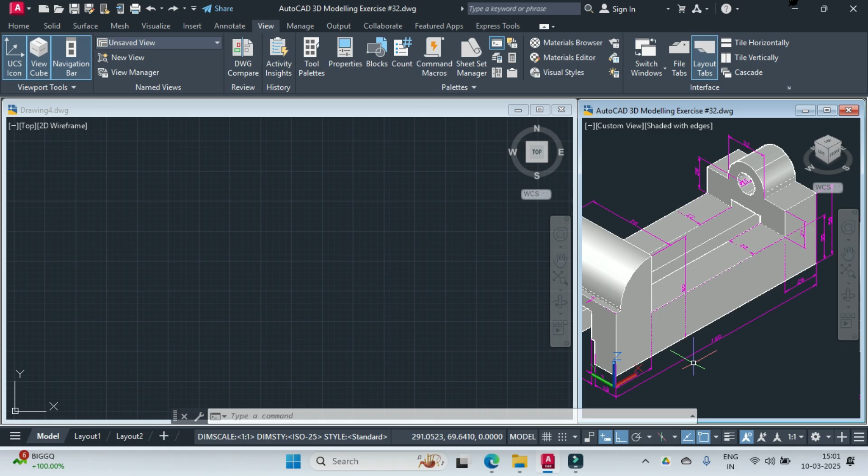Hi friends, in today's video tutorial, we would study how to prepare this geometry in AutoCAD. So as usual, before we start with the drafting, let us spend some time in analyzing this geometry and trying to see how we'll proceed with the drafting.

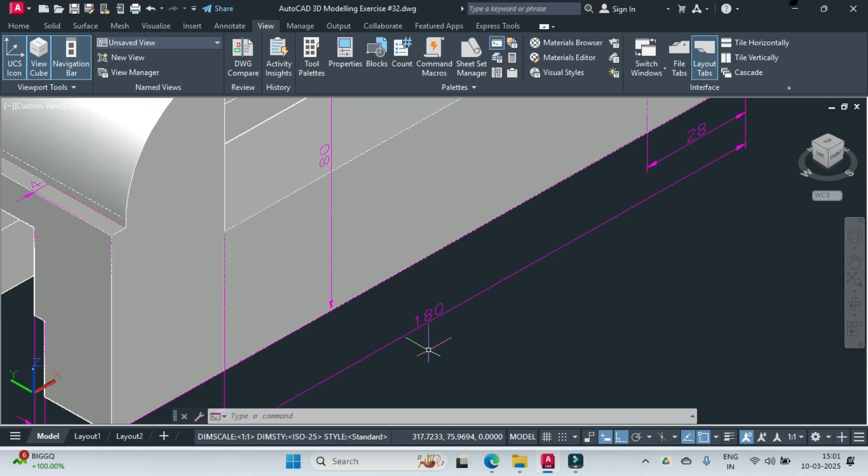After analyzing this drawing carefully, I feel that the best view to start this drawing would be in the front view. So we'll first change the view to front view, and using the P-line command, we'll begin by drawing one line of 180 units, then upwards 56 units, then to the left 28 units, then downwards 21 units. Why 21? Because 56 minus 35, so 21 units.

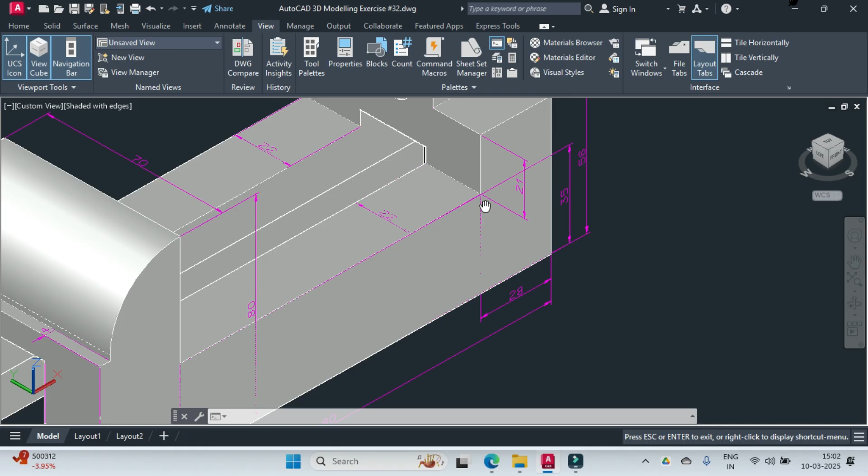Then to the left it would be 180 minus 32 minus 28, so this would be 120. Then we would go on the top 45 units, and that is because this whole distance is 80 units and this distance is 35, so 80 minus 35, so this distance would be 45.

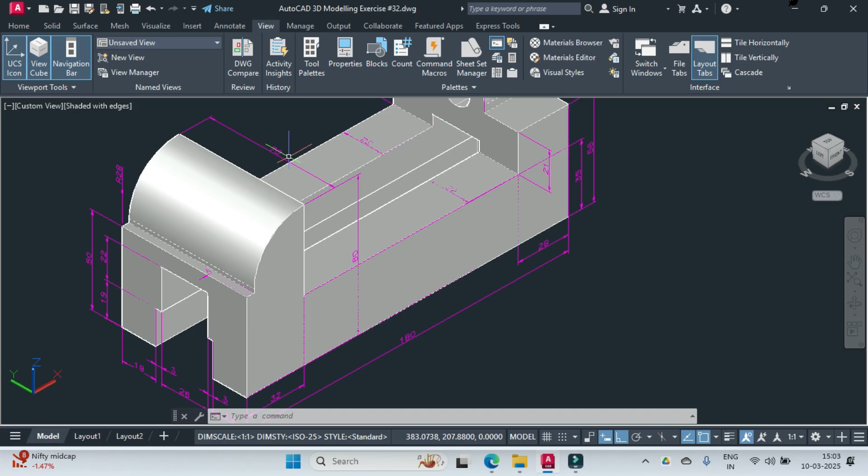Then we would go to the left, and you can see the radius for this fillet is 28, hence we'll go to the left as 28, then come down 30 units, then to the left 4 units, which is specified over here, and then C for close. So we'll get this profile in the front view. Then we go into the isometric view and extrude this to a thickness of 70 units.

Then we'll proceed with making this profile. Now, while making this profile, it is recommended that you first change the view to the left view. And in the left view, on the side, we'll begin by drawing one circle of 16 dia, and same center point another circle of 32 dia.

Then we'll draw one line. You can see this distance is 21 and this distance is 25. So we'll draw one line quadrantial to this downwards 4 units from here, and another line of 4 units from here, and then join it over here and cut this circle. Then extrude this outside to a thickness of 28 units. You can see this is the 28 units.

And then we'll move that entity from the center of this to the center of this particular surface. Then we'll use the union command and join both these entities and make it into one. Now we are left with making this profile.

So again, being in the left view, we'll begin by drawing one line from the base, and that line would be of 32 units, upward 19 units, then 3 units to the right, upward 22 units, 26 units this way, downwards 22, then again to the right 3 units, and C for close.

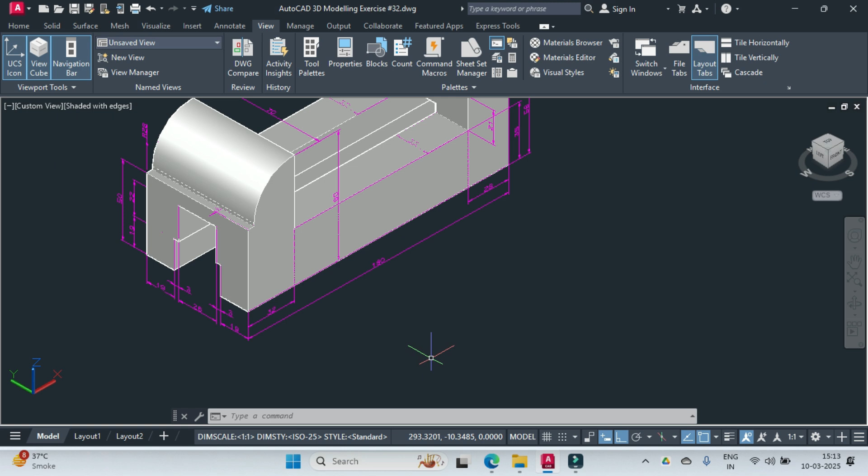Then we'll bring that profile in the center, and then using the press pull, we'll pull it outside and we get this cut. And our geometry would be complete. So let me show you how we'll proceed with this drafting.

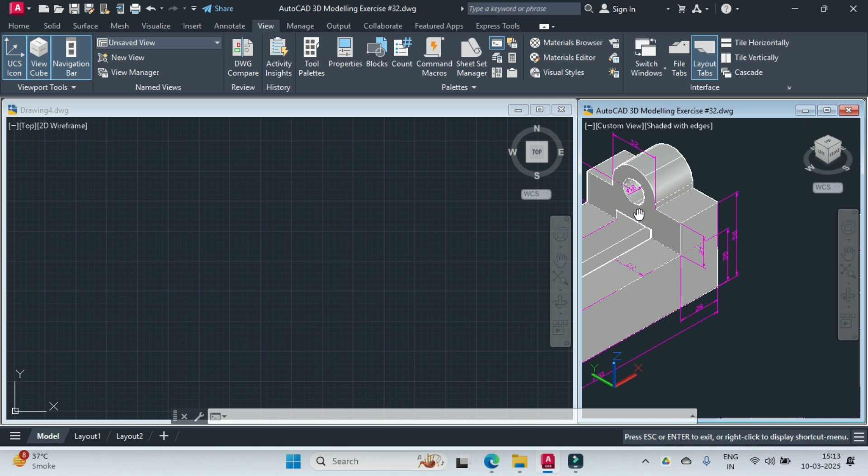So we'll first change the view to front view. Now we are in the front view, and we use the P-line command of AutoCAD and begin our drawing from here. So we'll first begin, we'll turn the ortho on.

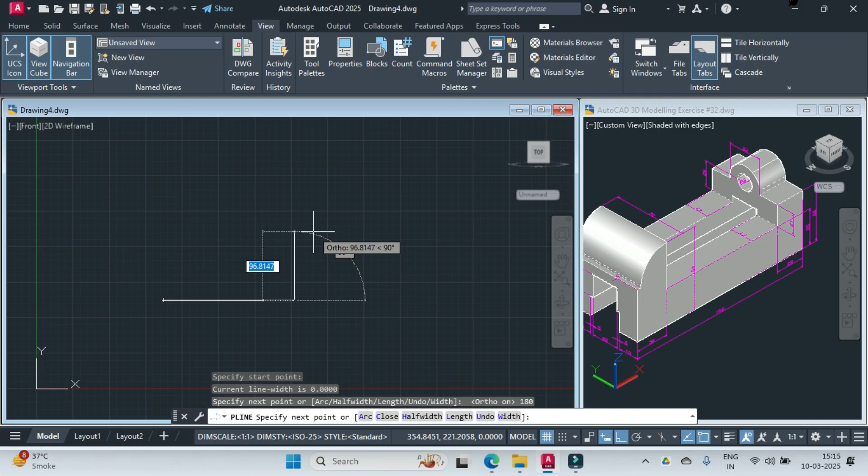So we'll begin by drawing one line of 180 units. Then moving that line upward to a distance of 56 units. Then to the left 28 units.

Then downward 21 units. Then to the left 120 units. Then upward 45 units. Then to the left 28 units. Then downwards 30 units. Then to the left 4 units. And finally C for close.

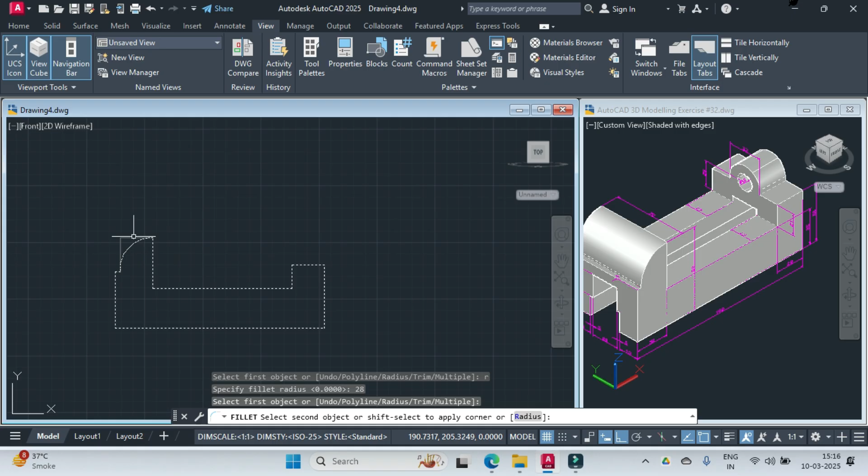And our profile is ready. Now we use the fillet command of AutoCAD, F for fillet and R for radius, and give the radius as 28 and click on this, and we get the filleted part.

Next we go into the southwest isometric view and we extrude the profile. So we extrude this profile to a thickness of 70 units. We type 70 and hit enter. And we change from 2D wireframe to shades of grey.

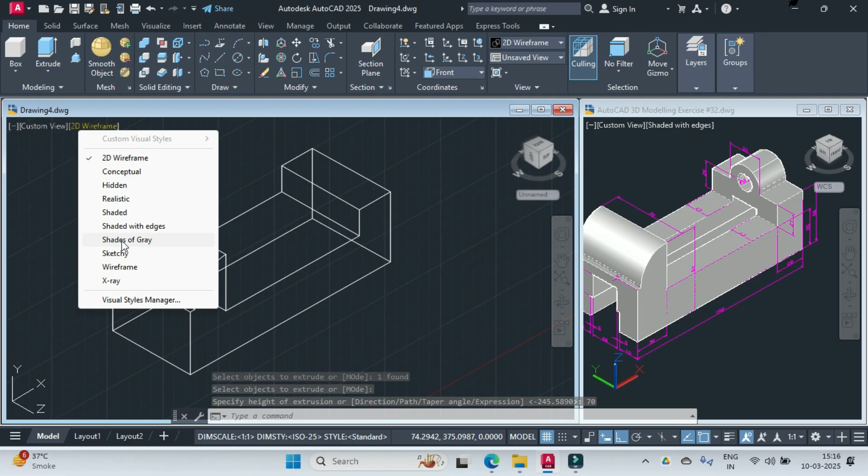Now we'll make this back portion. The first thing is we change the view to left view. You can see the grids over here. We'll begin by drawing this outer circle of 32 dia. So we select circle and select center diameter. Click anywhere outside and draw a circle of 32 dia.

Then we use the line command and draw one line from here downwards 4 units, to the right 32 units, and upwards 4 units. Press enter.

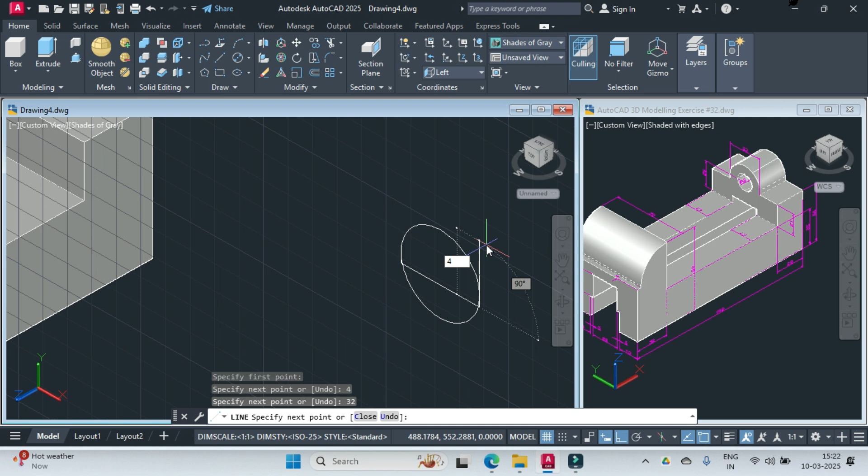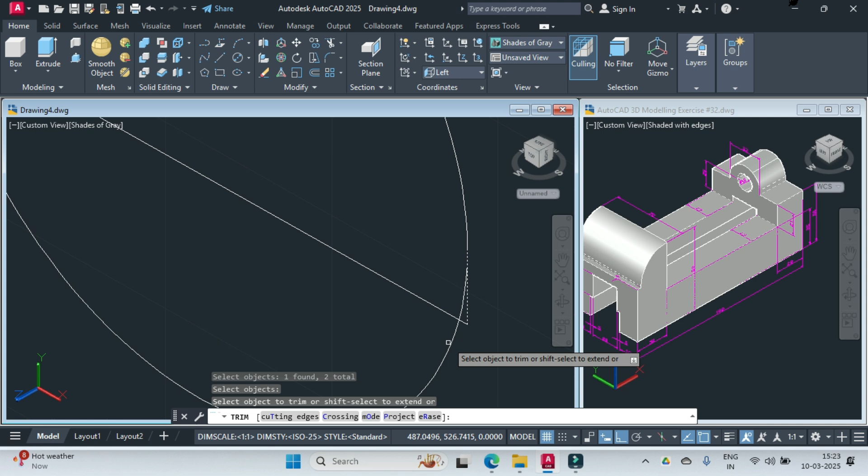Now we use the trim command. We type TR, double enter, select cutting edges — this is one cutting edge and this is the second cutting edge. Press enter and then click on the circle, and our profile is ready. We press escape to come out of the trim command.

Now we'll press pull this to a thickness of 28 units. So we use press pull and select our profile, press enter, and give a thickness of 28 units.

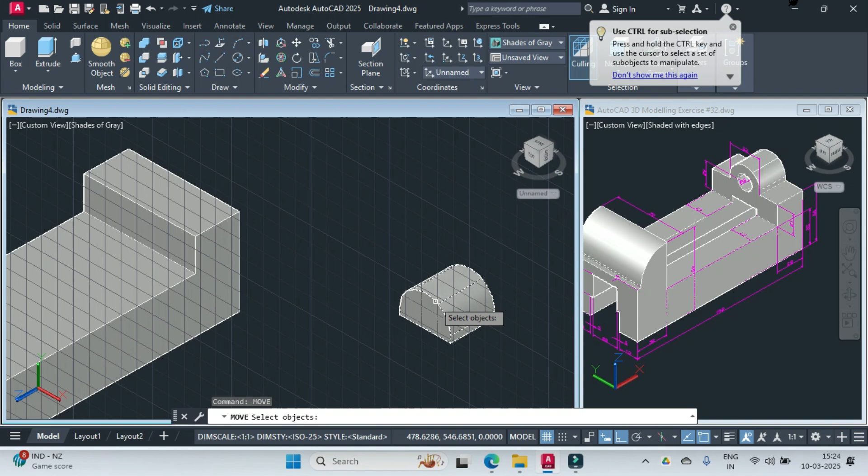Then press escape to come out of the press pull and we use the move command of AutoCAD. Select on the object, base point you select midpoint of this and move it to the midpoint of this. Then we use the union command of AutoCAD and select both these objects and make it into one.

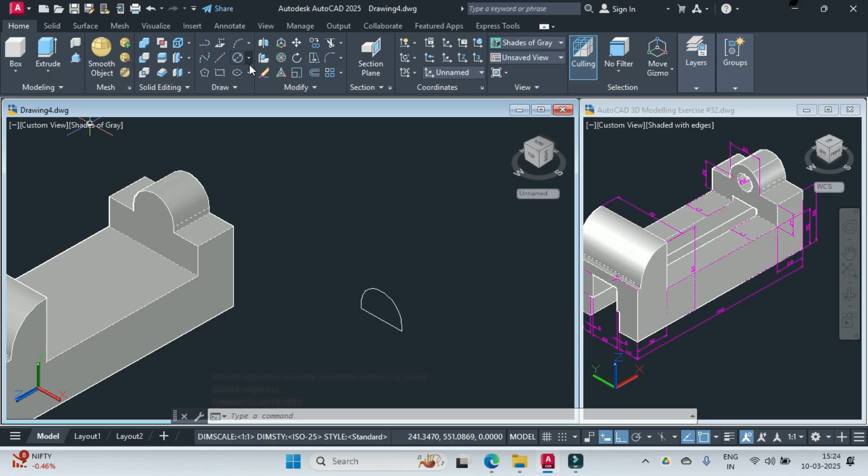Now we turn the grid off by pressing F7 and we'll draw this inner circle of 16 dia. So we no longer need this profile, so just select and delete it. We'll bring this in the center and select center diameter, click on this so that we get the center point, and the diameter is 16, hit enter.

Then we use press pull and select this profile and extrude this outside so that we get a cut like this. Now this profile is done. Now we have to proceed with this profile, and remember we are still in the left view.

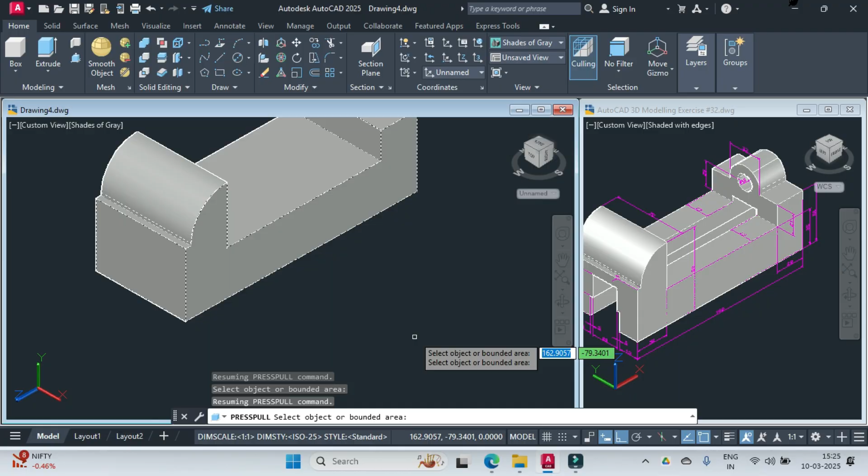So we'll begin by again pressing escape to come out of the press pull, and we use PL for the polyline, and we begin by drawing one line of 32 units.

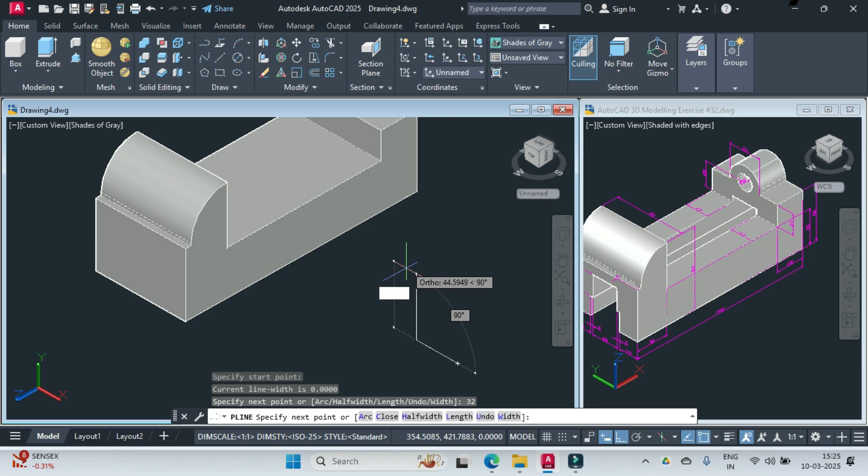Then upward 19 units, then to the right 3 units, then upward 22 units, then to the right 26 units, then downward 22 units, then to the right 3 units, and C for close.

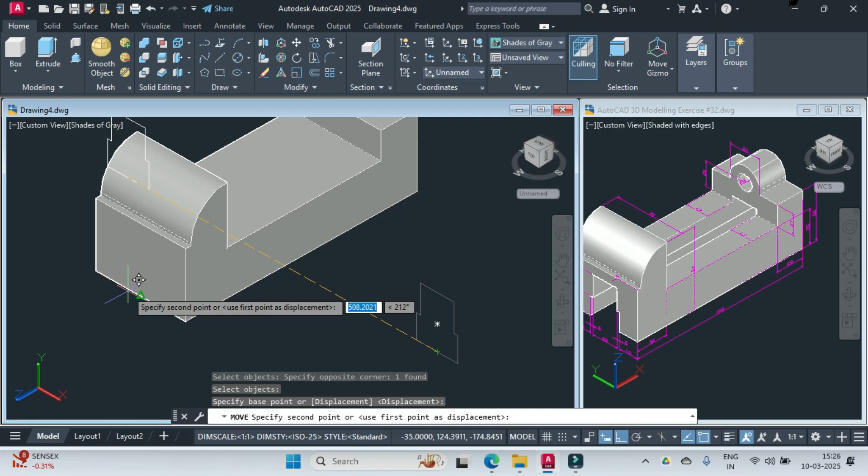Then we will move this profile, so we use the move command and select this profile, press enter. Base point is midpoint of this, move it to midpoint of this. Then use the press pull, select this entity and pull it outside, and we get the cut. Press escape.

We no longer need this profile, so delete it, and our geometry is now complete. You can use the orbit tool and view your geometry in all possible directions and see your geometry matching with the original geometry.